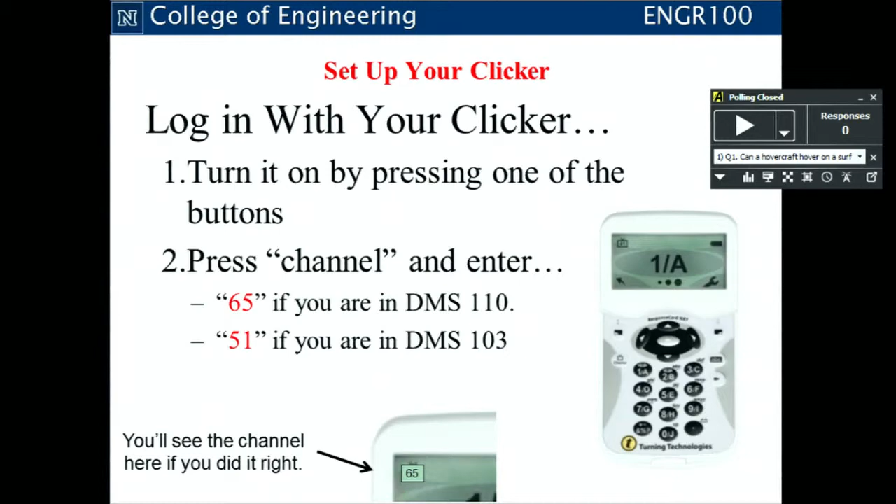All right, so 10-day plan. You guys have reading quizzes all the time. They're due every Wednesday at 11:59 p.m. Please don't log in at 11:57. If it times out while you're taking it, then you get a 0. So make sure that you get in there early in case you have any problems or something like that. But please get used to taking those. They'll be due on Wednesdays.

Your team charter, the due date got pushed back to this Friday. And you'll, yay! All right, who doesn't like to procrastinate a little bit? Friday by 6 o'clock in the EDL, so make sure you guys drop those off, get them to a TA or to Dr. Lacombe or I. And please keep a copy. It goes in your team journal, which I'm sure is near and dear to your hearts. You guys are going to keep track of all semester.

Skills lab assignments are due at 11:59 on the night before your next skills lab. So if it is the night before you go to lab, stay home and do your homework. Make sure you get done. Don't wait till then. Yeah?

He asked if it shows that, or if he has class on Thursday and it shows it's not due till Sunday, is that okay? No. A resounding no. Thank you for that question. That is a great one. Your homework is due the night before your skills lab.

We attempted to set it up so we'd have variable due dates, but it turned out to be a major headache. So it may say Sunday, but the TAs, before they grade your homework, are going to go through and look at what time it was turned in. So make sure that it's in by 11:59 the night before.

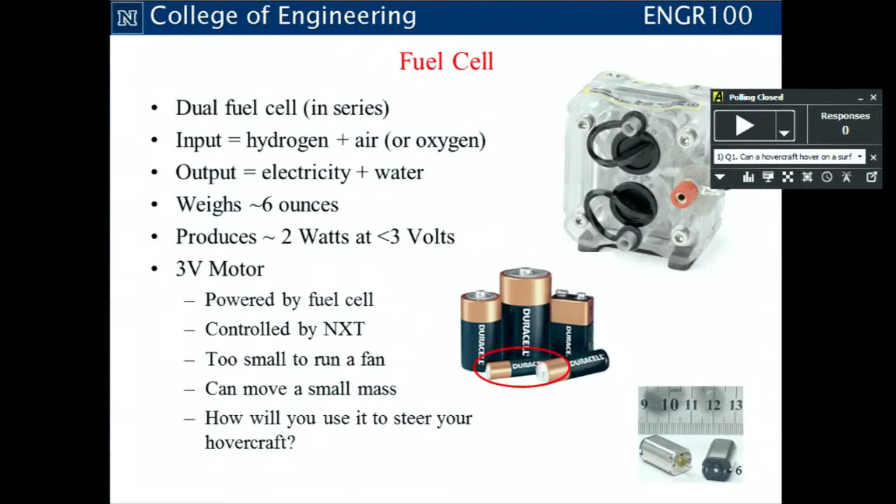Some of you might say, I've never played with an NXT, what are you talking about? Don't worry, we're going to go over programming in lab. We're going to use LabVIEW to control these things, and we'll talk about it in class and in lab. You guys will get the opportunity to program these a lot, so you'll be experts, hopefully, by the end of the semester.

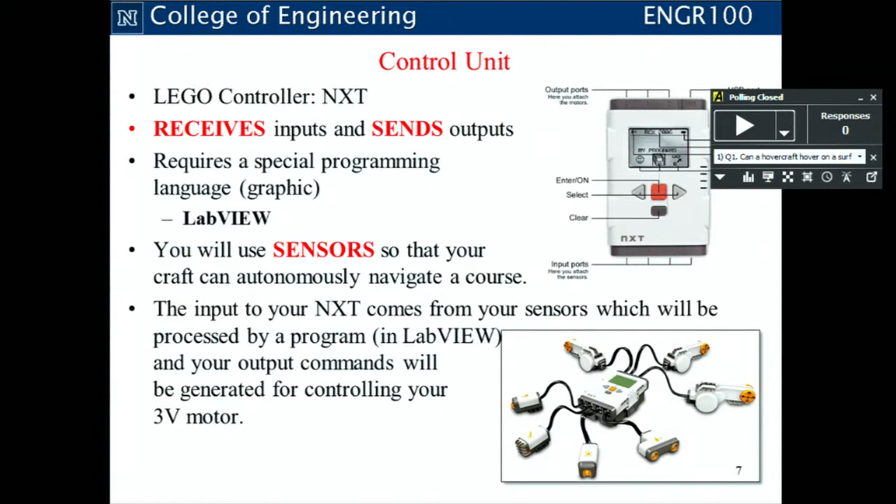Questions yet? These are easy. Okay, all right, $300 budget.

I believe this was a clicker question last time. If you missed it, don't miss it if it gets asked again. You guys have $300 between your team, whether you have 4 members or 5 members. The budget is for the total, complete cost of your hovercraft.

So if you were to choose non-rechargeable alkaline batteries, which we highly suggest you do not, but if you use them for testing, you'll be stuck in that part of the design process for quite a while. Then you use them for checkpoints and the final competition, but you want fresh batteries because you want the fastest hovercraft you can have. You start going through those.

Someone's running out to the student store to buy batteries, and every single battery goes in your budget. Even if your hovercraft only runs on 8 AA batteries, every single battery you buy goes into it.

If you go with the decking material, say you try and use plywood, go against what we suggested and say, I can use plywood, I can do it. That's fine. Then at some point you decide your hovercraft is really heavy, and you need it to be lighter, so you go with styrofoam. Guess what? The plywood and the styrofoam all go into that $300 budget.

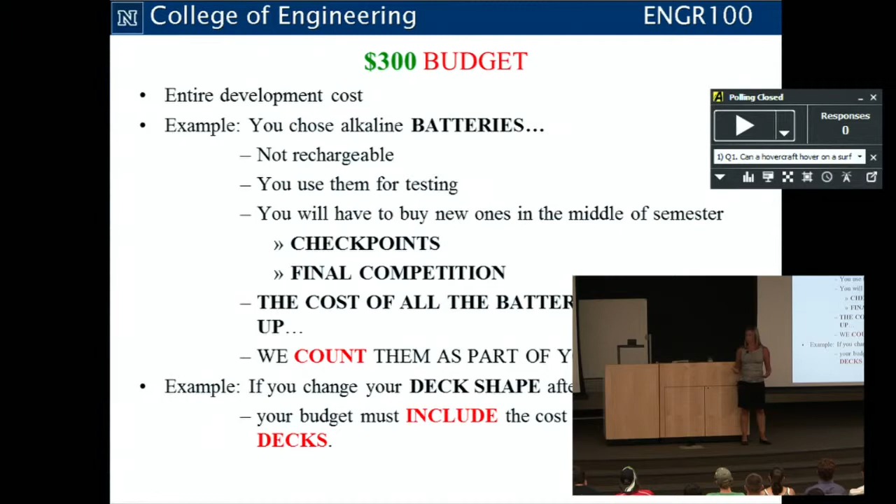We don't want you guys to spend a whole lot of money. We're trying to save you money. But that being said, we need to make good design choices. That's what engineering is about, right? We're going to do lots of calculations, design our hovercraft on paper. You guys are going to tell us what you plan to do, and we'll approve it and go from there. But please keep in mind, whatever you purchase, it all goes into your $300.

Questions yet? Yeah.

If you have materials that are free, you are very lucky. I say use them. If you can find stuff around, please don't destroy a desk to make a hovercraft deck. But yes, if you have access, we can discuss.

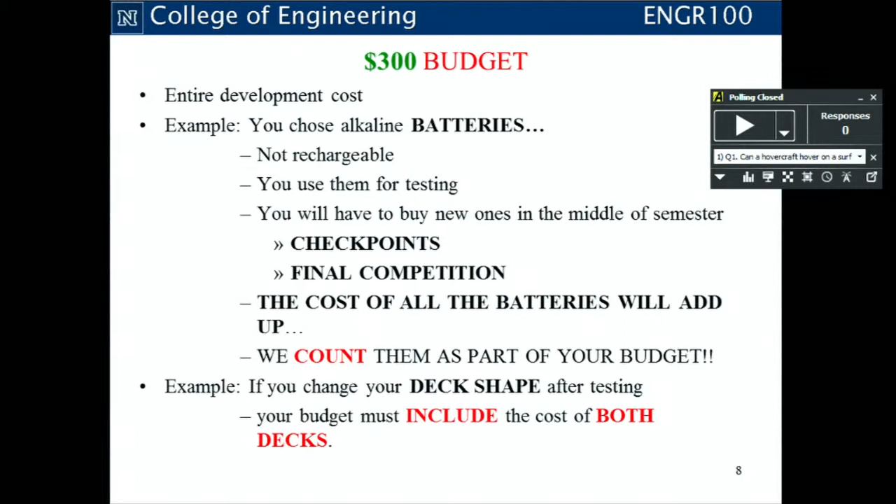Anybody else? Questions? No? Okay. More bad jokes, right? All right.

Do not buy anything yet. Please don't buy anything yet. We want to look at your designs. We don't want you to buy a bunch of things and then have to ship them back and waste money back and forth, ordering from someone who doesn't take returns, and so on. So do not buy anything until we approve your design.

You guys have a design concept paper due eventually where you'll tell us what you're going to do. You'll also have all your calculations due. The TAs, Dr. Lacombe, and I will look over those, approve them, and then tell you to go buy. So please don't buy things yet. Wait.

All right, so the main topic for the day is lifting fans. You might want to jot down a couple notes here. You can follow along with your calculators. A little bit of math today. First off, to tell you what I'm going to tell you for the day, you'll get used to that for your presentations. We are going to talk about lifting fans and how to choose them, and look at some examples.

But first we have to talk about what types of fans there are, the design procedure and how we do that, and then we're going to do an example calculation to finish up class today. So we'll go through all these things. It's a lot of information, just be warned. But you guys can go home tonight and do the lifting fan module.

And there's also a video that shows you how to do this. You guys are doing fans in Skills Lab this week, so you'll get to see this many, many times. If I'm going too fast and you have a question, just raise your hand. If I don't directly see you, it's hard to see everyone all at once, so yell or something, jump up and down.

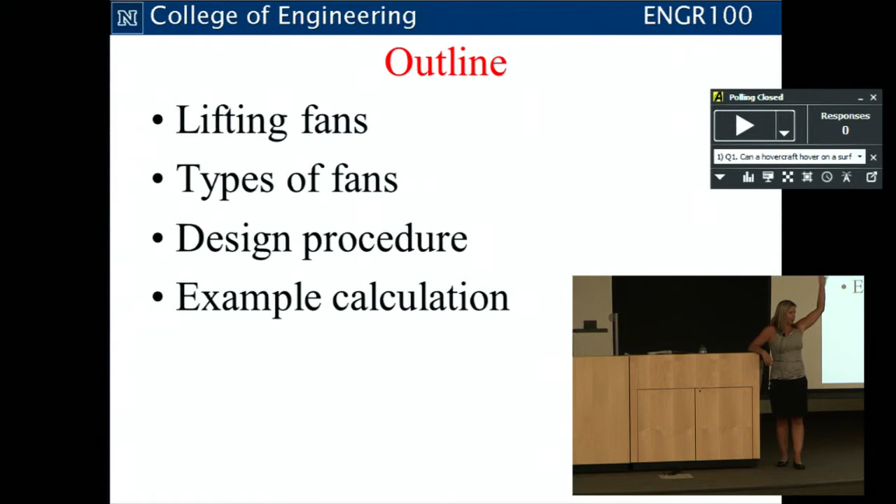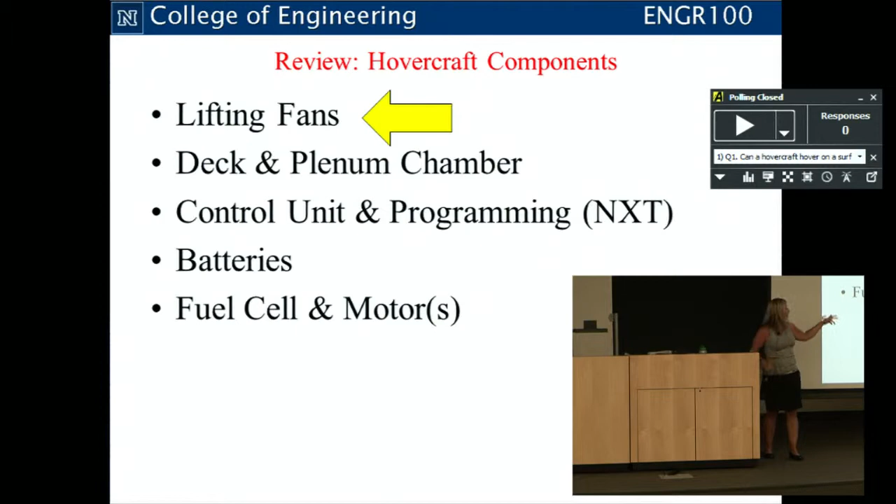Okay, so hovercraft components: you guys have your lifting fans, your deck and plenum chamber, the control unit, batteries, and then the fuel cell and motor. So we are focusing on lifting fans from here forward.

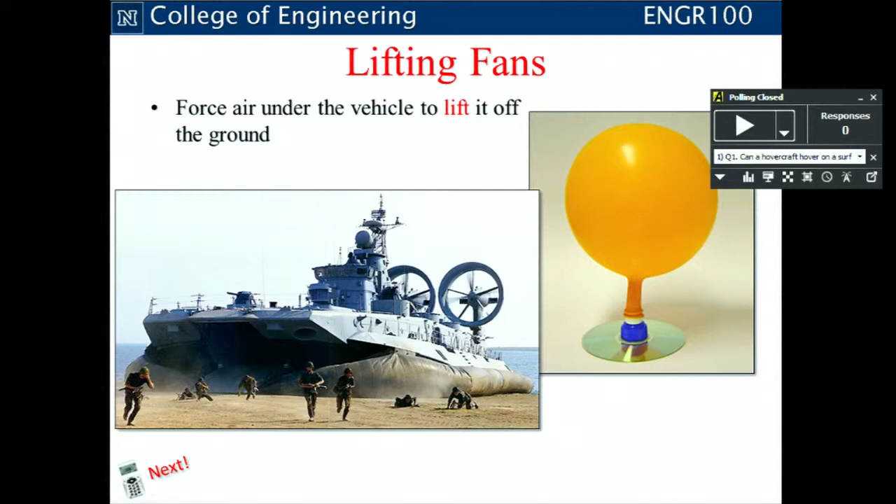Hovercrafts go on all scales. We've got the small little balloon one we can make in class, up to the military hovercraft. The Kiwis hovercraft you guys saw got flying around in New Zealand last week. Did you guys watch that video? I think so.

So, question number one for your clicker. Remember, you got to create pressure under your hovercraft. Hovercrafts are commonly used to float above water, concrete, sand, snow, and ice. Can a hovercraft hover on a surface made of mesh chicken wire? Yes or no?

Remember, your hovercraft needs to create pressure. You got to force air down and create pressure.

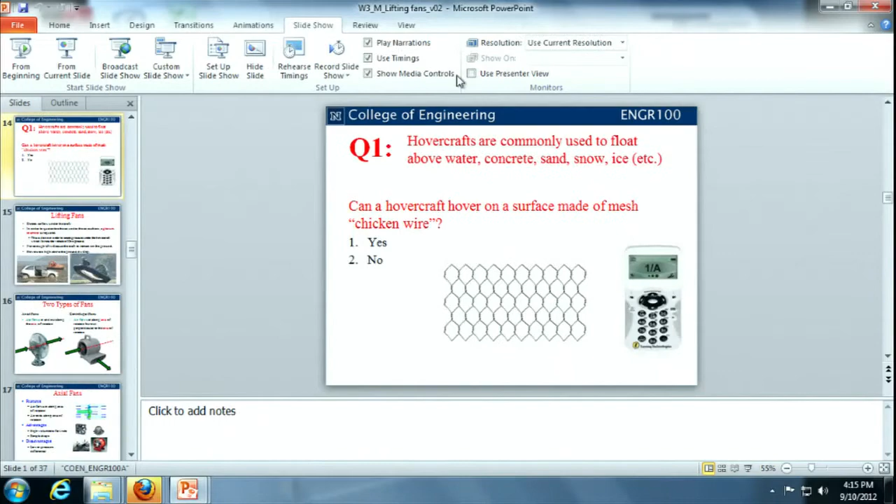Oh, no. Oh, well. Man. You guys lucked out. Let's see here. Oops, bear with me. Oh, I don't know if you guys were quite saved. Let's see.

Okay, you have a question? No, he's asking a question. He thinks he got his answer in. He was one of the lucky 27 in here. Good job. I think you should answer again. Yes, please. We'll try again. Sorry, we'll see how this works.

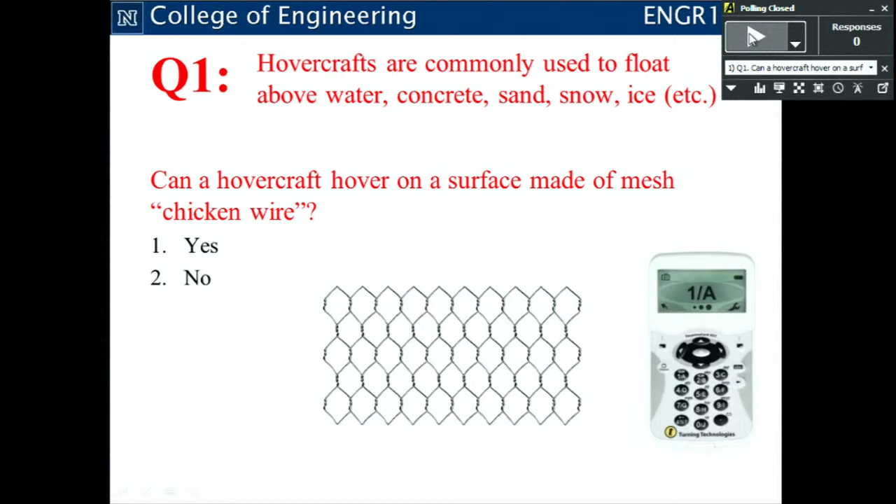All right, ready? On your marks, get set, go. What's going on? 377. 5, 4, 3, 2, 1.

This makes me very happy. This means I'm doing my job. Okay.

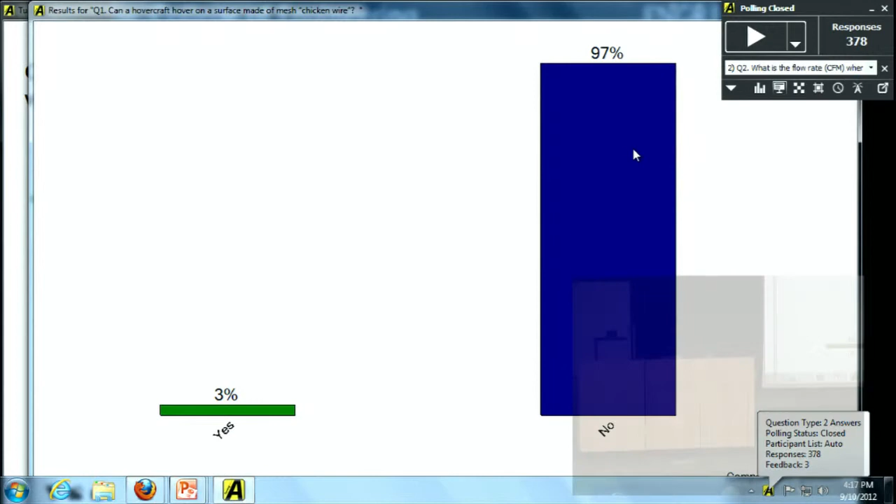If your hovercraft just had a mesh surface underneath it, the air will go right through. And if the air goes right through, you have nothing to build pressure on. So the air needs to go down to a hard surface. You need to trap that air. And as the air is trapped, your plenum chamber is going to fill up and create pressure, and you will get lift. Okay?

Questions? All right, good job, good job. Sorry about the confusion.

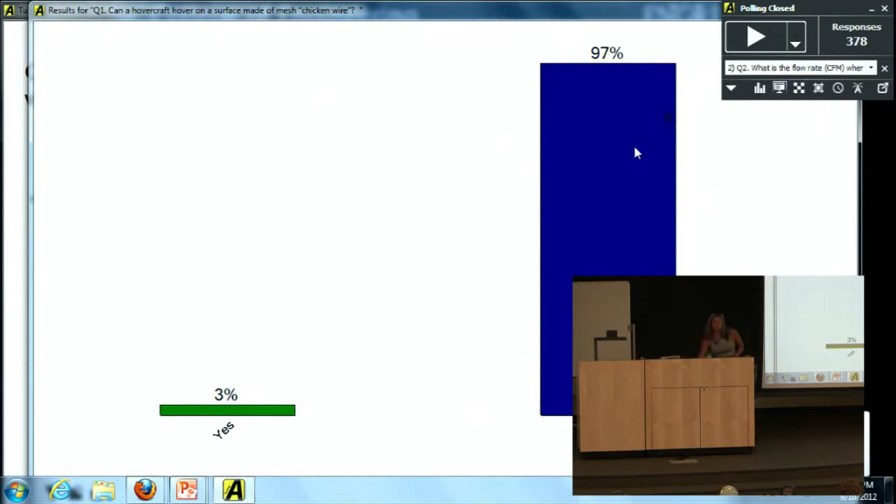Okay, moving forward. So your lifting fans are going to direct your airflow right underneath your craft. Your fans could be facing directly down if you want them to, or they could be facing a different direction, but you're going to need ducting that forces the air down. So the idea is that the air is going underneath your craft. You want it to fill up that plenum chamber. Remember, the plenum chamber is what's trapping your air underneath your hovercraft. So as the air is pushing down onto the ground or the track, that is going to slowly force your hovercraft off the ground. Okay?

So you need that plenum chamber, hard skirt, to trap the air. Not enough lift is going to cause your hovercraft to not get off the ground, in which case, let's try and get off the ground. If you get too much, your hovercraft can tip over like this guy over here, right? He's about ready to go backwards.

So be careful with your guys' hovercrafts in here. You kind of want to find that sweet spot, because if they're too high, they're going to be really hard to control. You're not going to have any friction whatsoever. It'll be easy to go down, but it'll be hard to go down in a straight line and make it back. So you want to find that sweet spot, and we'll talk about an ideal height today.

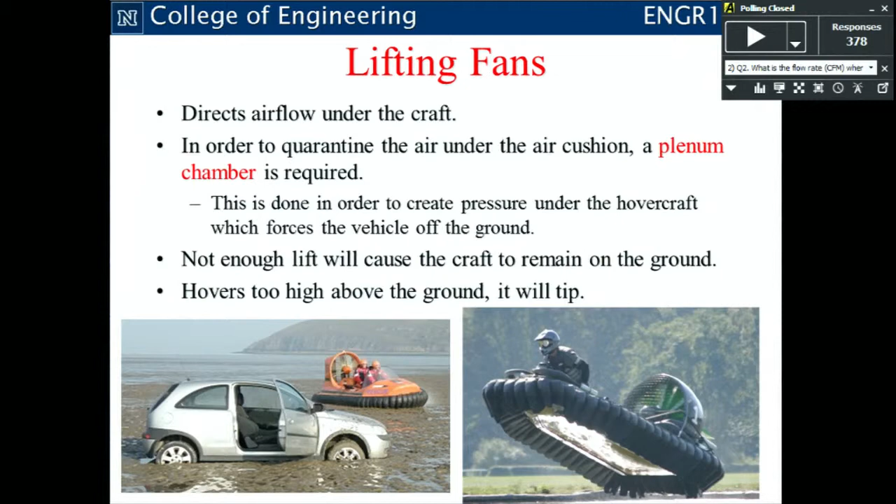All right, so there's two types of fans. The first is similar to the ones you guys probably use in your dorms that don't have air conditioning. It's just an axial fan. What it means is that the air goes in on one axis and comes out along that same axis. So axial fans, air goes in on one axis, comes out on one axis. We'll look at some characteristic curves in a minute so you can see the difference.

The second fan, which you may or may not have seen before, is a centrifugal fan. What happens with the centrifugal fan is our air goes in on one axis and it comes out perpendicular. You guys can see on the arrows on the PowerPoint here, we've got in one axis, out the other.

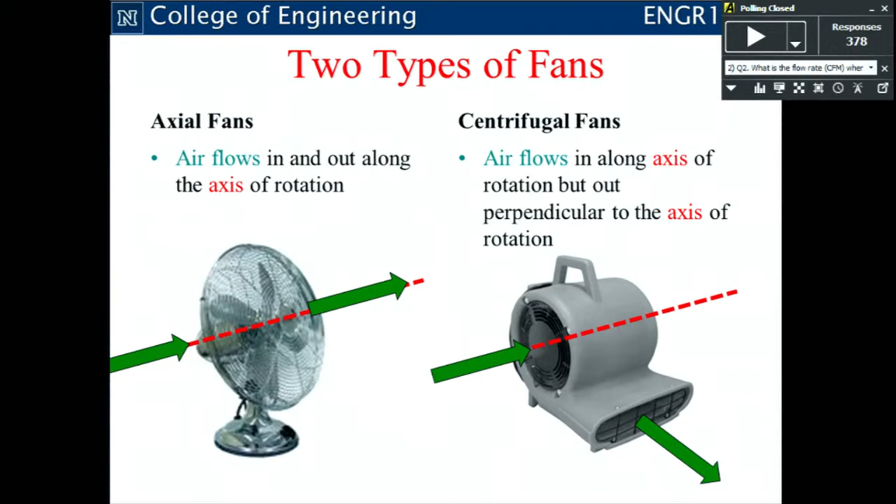And the fans can be used for fundamentally different things, and I'm going to go over each one of them now. You guys can decide which ones you want to use.

But the disadvantage to the axial fans is that they have a lower pressure differential. Remember, when we're talking about lifting, we're talking about creating pressure. You want to force air down to create pressure so you can get lift. These fans draw a lot of air, but they don't give out a lot of pressure. You guys have hopefully seen computer fans, that's kind of what we're talking about here. If you have a computer fan running, you don't get a huge breeze if you put your hand in front of it. Not a whole lot of pressure coming out of there, but a lot of air comes through.

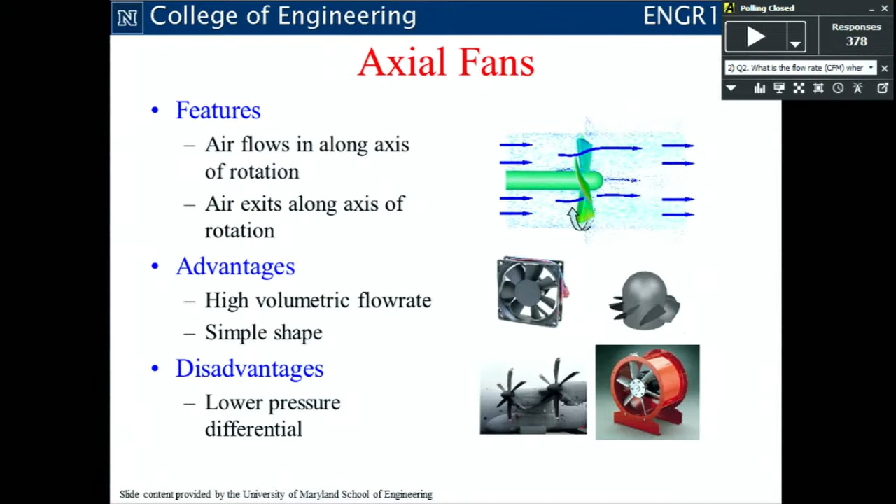On the other side of things is the centrifugal fans. Again, you get air along one axis and out perpendicular. The nice thing about centrifugal fans is that you get a high pressure differential, a lot of pressure coming out of these fans. The disadvantage is it's not pulling as much air as an axial fan, and it's more complex, kind of looks like a funny little conch seashell. So it's a little harder to build with, but I have faith you guys can do it. So a centrifugal fan: you get air in one axis, out the other, and you get lots of pressure.

Yes, in the back. By comparison, which one ends up being hotter? I would assume that the centrifugal is going to run a little hotter because it typically draws more amps. Yes? Why do we care?

Why does it matter how much air the fan is bringing in versus pushing out? Right, but why the high volumetric flow rate? Good question. If you were going to use, well, you guys aren't because you're using fuel cells, but if you were going to use these fans for, say, propulsion or something, you might want to affect more air around you because it gives you more steering control, something like that.

Exactly. If you were using back fans, if you had fans on the back of your hovercraft, they're going to give you more control. For you guys, the focus is to get off the ground and get high pressure. But I want to tell you about the different fans available so you can make design decisions, right? That's part of the process, is seeking information. Anybody else? Good questions, thanks for those.

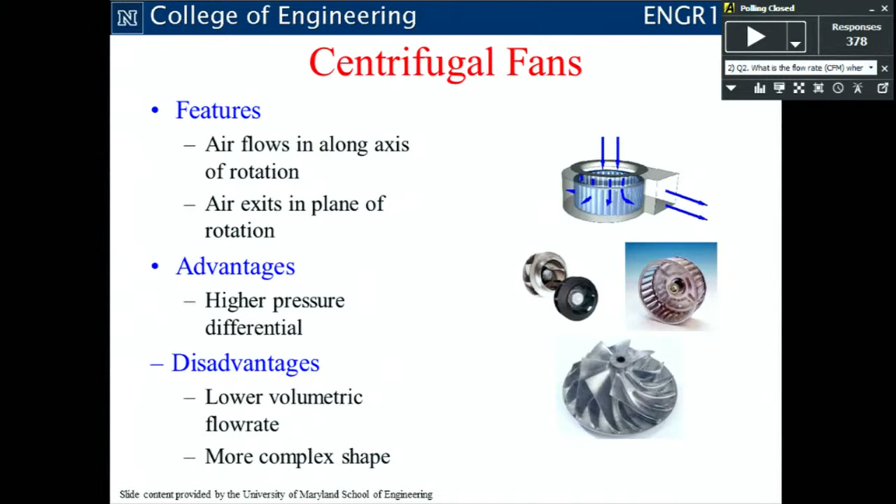Okay, next up, here's some curves to take a look at. You guys got to learn how to read fan curves, fair warning, there might be a question coming about them. These two fans are very, very similar, they have similar RPMs, meaning their rotors are rotating at the same rate. They're both 12 volts, 2.5 watts versus 3.5 watts, and they weigh about the same. Essentially, they're pretty much the same, but one's axial and one's centrifugal. There is a big difference here though.

You'll notice in our axial fan, if you guys can see this far, the pressure ranges from 0 to 70, versus on our centrifugal, we're from 0 to 200 on this graph. My flow rate, that's how fast the air is coming through, that volumetric flow rate: on the axial, I've got 0 to 2 down here, centrifugal 0 to 0.6.

Got one more graph I'm going to show you on the same graph. You'll see the curves and they look a lot different. But what's to keep in mind is when we look at lifting fans, we need to know how much pressure am I getting from that lifting fan. So if I said that I needed, let's go with something on both, let's say I needed 40 pascals.

And we'll look at this 12-volt fan, the 12-volt fan is in red. You'll find these fan curves when you look them up later, they have a bunch of different fans on the same graph, so please make sure you're looking at the fan that you want to purchase. Anyway, so if I have a pressure of 40, I'm going to come across until I see the line that represents the fan I want, and our 12 volt is in red. So if I go across that red and drop down, you can see that at 40 pascals, I can only get about 0.2 meters cubed per minute.

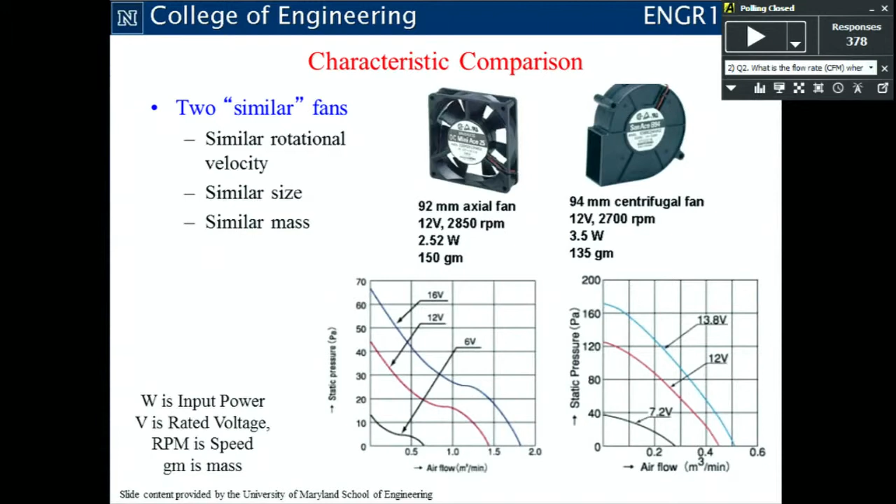So just for a comparison for you guys, if I come over here and I look at my pressure, 40, going across to my red line here, that's my 12 volt fan, and drop down, I'm getting about 0.3 meters cubed. So 0.3 versus, what did I say, 0.1 or so? 0.2? Okay, makes a difference. Oh, actually sorry, did I go? No, we're good, we're good. All right, so let's look at them on the same graph.

Maybe this will help if you didn't buy the difference yet. The red curve is the centrifugal fan, we can tell because it's got that high pressure. The blue curve is the axial fan, lower pressure but more CFM.

You could end up anywhere along this curve with your hovercraft. It depends on what pressure you're operating at. So if you needed a pressure of 60, this fan just won't work for you at all. That axial fan won't, but you could use the centrifugal fan.

And I'll show you another example as we do calculations. But keep in mind, you look for your pressure first, okay? Follow the y-axis along to that curve and drop down to find what your flow rate is going to be.

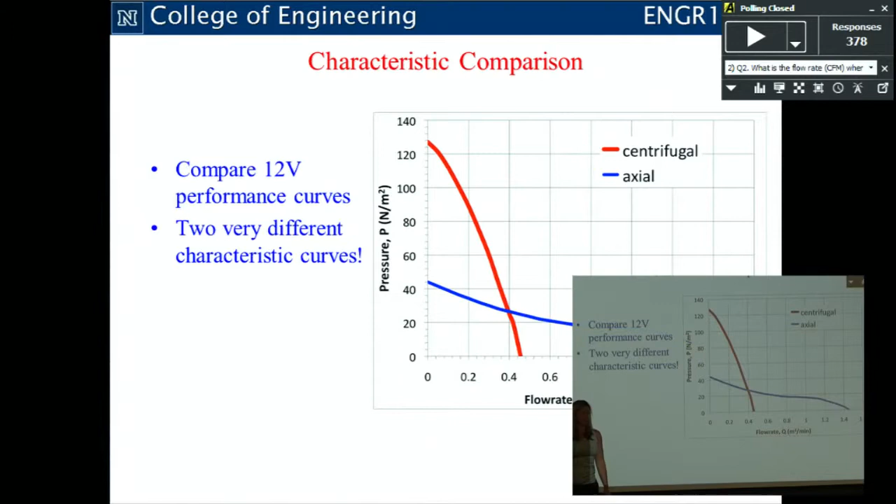What if you had more than one fan? Would it affect the numbers? If you have more than one fan, you can add up the flow rate, which is a very good question, because you very likely might have more than one fan. You can add up the flow rate. You cannot affect the pressure, though. So if you have two fans at 0.2 pascals, that does not equal 0.4 pascals. The pressure remains the same, but the flow rate will double or triple however many fans you have.

Anybody else? Yeah. For lift, he said, do you really want pressure or flow rate? You really want pressure. That's what matters when you're talking about lift fans. If you can't meet the pressure, you're not buying that fan.

The flow rate, we're going to go over some math equations. You'll see at the end, you need a certain flow rate also to get off the ground, but the pressure is the most important part, so the flow rate second. So I guess my point in all this, and we'll get to flow rate, is that you need a required pressure, and then once you have that, you make sure you have the CFM you need. So you need both. I just don't want people seeing a flow rate. If they need 100, I don't want them seeing 100 and not matching the pressure.

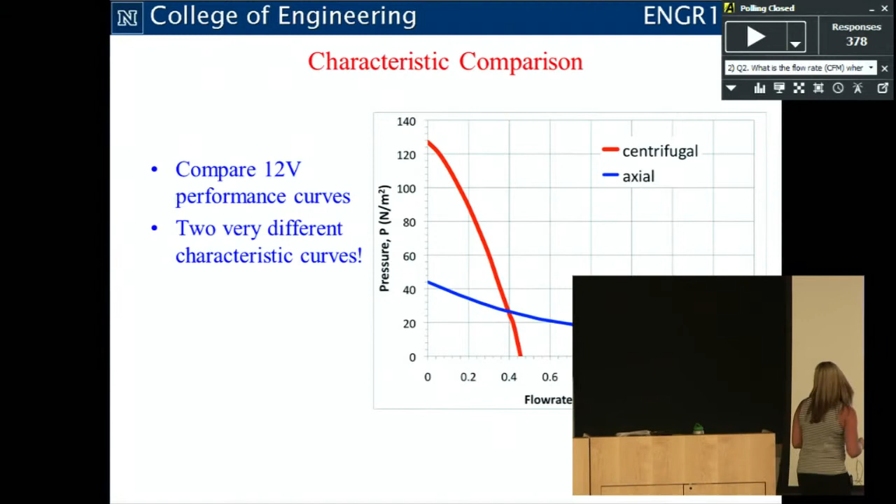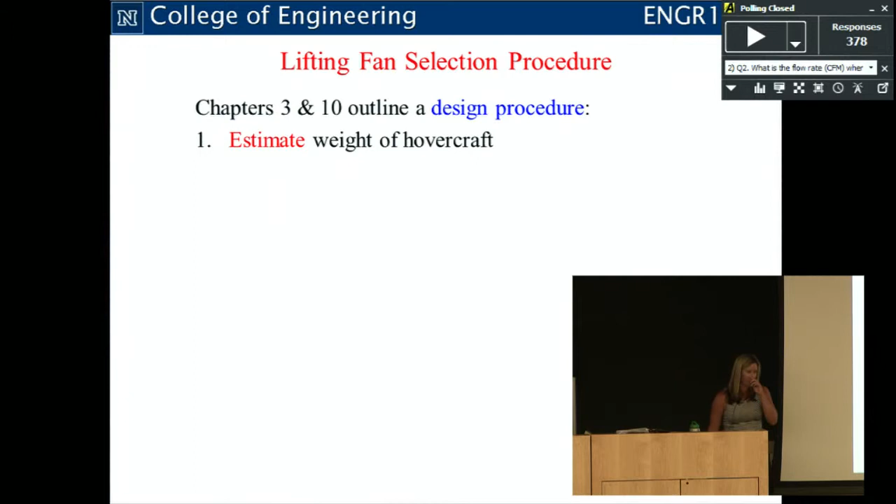Okay, so the procedure. Chapters 3 and 10 will be very helpful to you, please read them. And you also have the online module on lifting fans, keep in mind. So I'm going to give you guys the steps for designing your hovercraft's lift or choosing fans. Things in red are things that you choose. Things that say calculate are things that are just governed by math and physics, you can't change. But things in red are the things you choose, and that's the beginning of the design process.

You get to make these choices, and remember the design is iterative. So these choices you make, everyone in here is going to have different hovercrafts, right? Because you can all choose different things. So the first thing you want to do is estimate the weight of your hovercraft, and we'll use Excel to do that. I'm going to show you guys an example, list out the steps, and then we'll go through step by step with an example.

But first thing you need to do is estimate the weight. This means looking at how much the NXT weighs and the fuel cell, and looking at how many fans you think you need and batteries, and coming up with an estimate. It's not going to be exact. I get that, it's okay. But you need a good estimate. So first thing is estimate the weight.

Second, choose the desired gap size. The gap size is how high off the ground your hovercraft goes, so it's the gap between your plenum chamber and the ground. We'd suggest between 3 and 5 millimeters. That's typical. For our example, we'll do 5 millimeters, erring on the side that gives us a factor of safety, so we can make something heavier if we need to. Again, choose is in red, meaning that's something you design. You guys think about what you want to do. So now we've got a weight and a gap size.

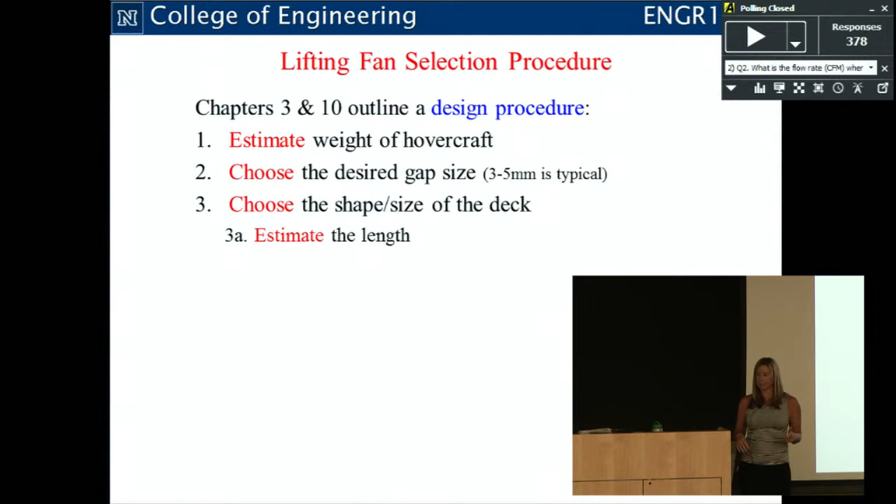A soccer ball, okay. And then once you choose a shape, you need to estimate the length, because you're going to have to calculate the area and the perimeter. So choose any shape you want, but keep in mind that you need to be able to calculate the perimeter and the area of that shape, as well as construct it and balance it. So our things in red here: we've got our weight, the gap size, the shape, and the size.

Those 4 things you can iterate later if you need to make changes. These are your choices. From now on, we're getting to more of the calculation side of things. You have to follow. So we'll calculate the perimeter and calculate the deck area. Start thinking about doing some brainstorming, doing some searching, reading your book, and finding out what shape and size is going to work best for you and your group.

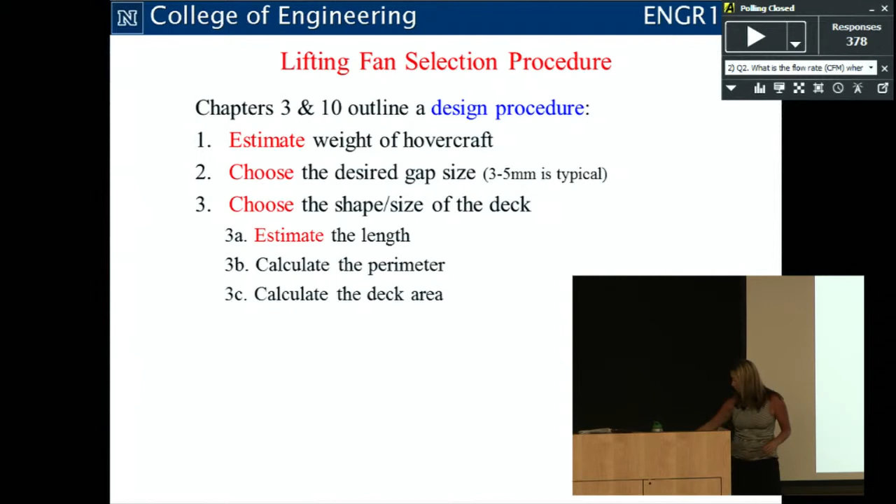All right, so after we have our area and our perimeter, we need the pressure required to generate lift. We've been talking a lot about pressure with these fans, and now we need to figure out what that pressure is.

And after we get our pressure, we need to calculate the gap area. We'll talk more about this. The gap area is, it's like the perimeter times your gap height. So it's a little bit of area between the hovercraft and the ground.

From there, 2 things left. We're going to calculate the exit velocity, or sometimes you'll hear me call it the leakage velocity, depending on the day. The leakage velocity is how fast air is leaking out the bottom of your hovercraft. Again, I'm going to go through each one of these steps, and I'll explain a little more about each step as we go. I just want you guys to have this ready to go for it.

All right, last but not least, we calculate the required flow rate of the lift fan. So we've got our pressure, and then we need to find out what that flow rate is that we need. So Q, or CFM, or meters cubed per minute.

And then we've done all our calculations. Yay, math time is over. We need to find the appropriate fan. Sometimes that's not possible. You may have been that group that waited till the last day to do your calculations and pick your fans, and all the other groups bought up all of DigiKey's other 300 fans.

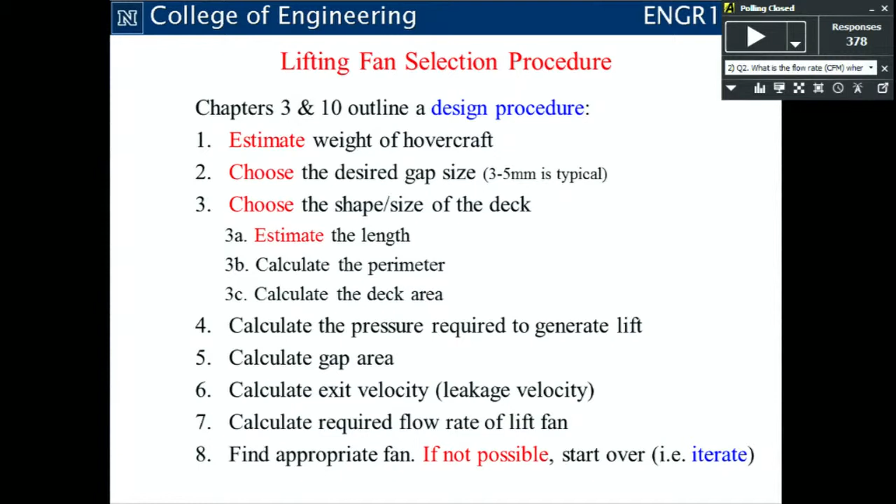Step 1, estimate the weight. In Excel, you guys will have a chart. You'll see up here I've got my main components, starting with the lift fan. I think I need 2 of those. They're going to weigh about 0.6 pounds each.

They get 1.2. You guys know how to put in equations in Excel now after Skills Lab this week, so this should be easy. You have your fuel cell and connectors and motor, NXT, some batteries, your deck, sensors, and relays. I have estimated these weights. They are approximate. So my approximate total weight I've come to is 3.03 pounds. This can change, but we needed to come up with an estimate, so here's our estimate.

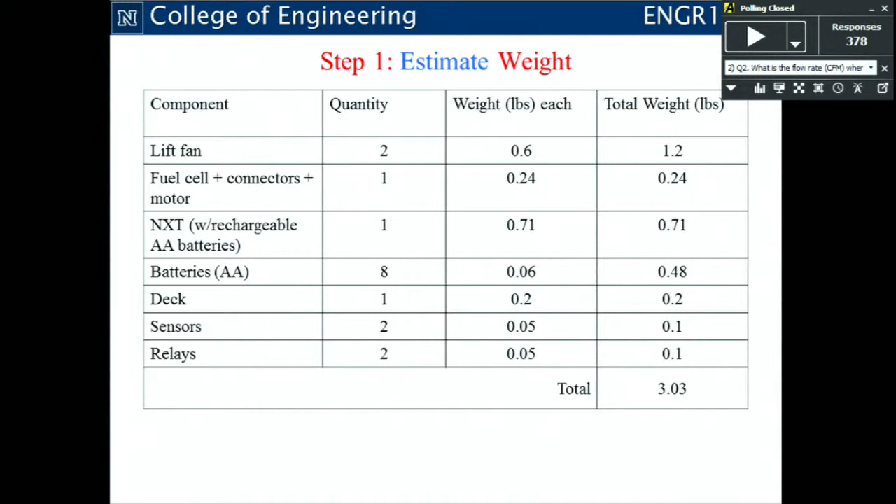Okay, moving forward. Next up, choose the desired gap size. So 0.2 inches or 5 millimeters is the maximum. We're going to use that for now because this gives us a little bit of error room.

If all of a sudden our weight estimate goes up, it's not that big of a deal. So we're going to use 5 millimeters for this example. The air cushion underneath the hovercraft is called the plenum chamber, and that is formed underneath the craft. The gap I'm talking about is between the plenum chamber and the ground. So it's barely perceptible, but it's there, and it's going to be 5 millimeters in our case.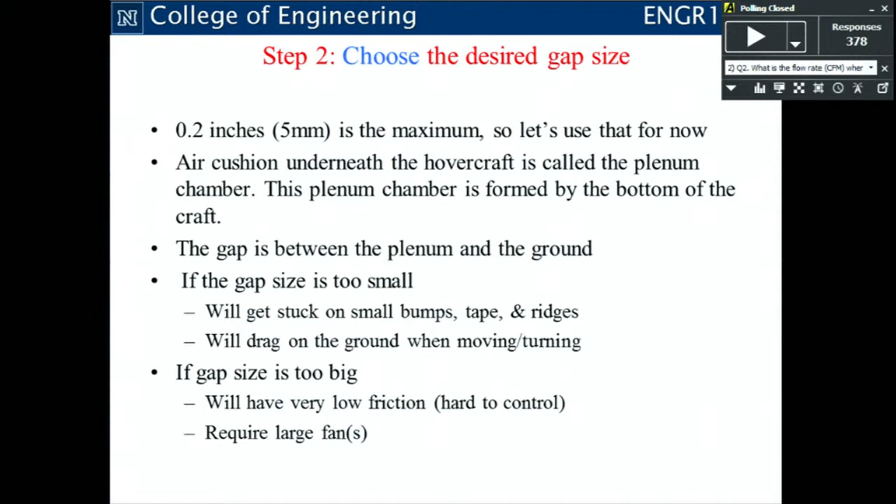If your gap size gets too small, if you calculate it and then start adding a bunch of art materials and stuff to make your hovercraft look really pretty, sometimes it can get stuck on small bumps, tapes, ridges. Another team could throw out a pebble or something. Hopefully they don't, but it can get stuck. It can also drag on the ground. That's kind of a problem. If you don't get off the ground, that's really a problem.

If your gap size is too big, you're not going to have barely any friction, and no friction means it's going to be really difficult to control. So we want to find kind of the sweet spot in between here.

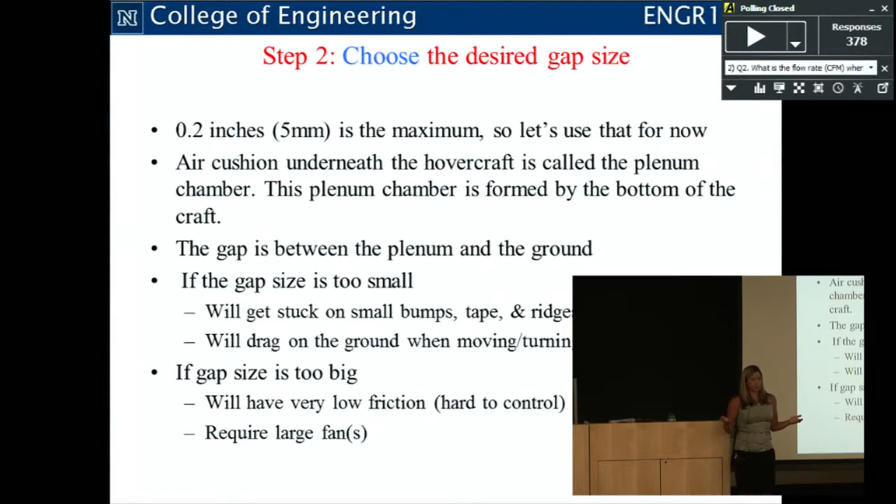All right, next step. So we have a gap height, and we have, what was our first one? Our weight. So now we need to choose the deck shape. Again, whatever shape you want, just beware that you have to calculate the area, the perimeter, and you need to be able to balance it. Common shapes are squares, rectangles, circles, a bullet shape, or a big oval, things like that. You guys choose. That's something you guys can research as a group.

So we're going to assume a square for this example. It's easy calculations. First thing I'm going to do is get the perimeter. The perimeter, we just add up the length of all the sides. And then we are going to get our deck area, length times width. And we end up with, what's it, 576 inches squared. So the start of the math is calculate the perimeter and the area.

Next step is ready. Am I going too fast? No? Yes? No? No one's yelling at me, so I'll take that as a no.

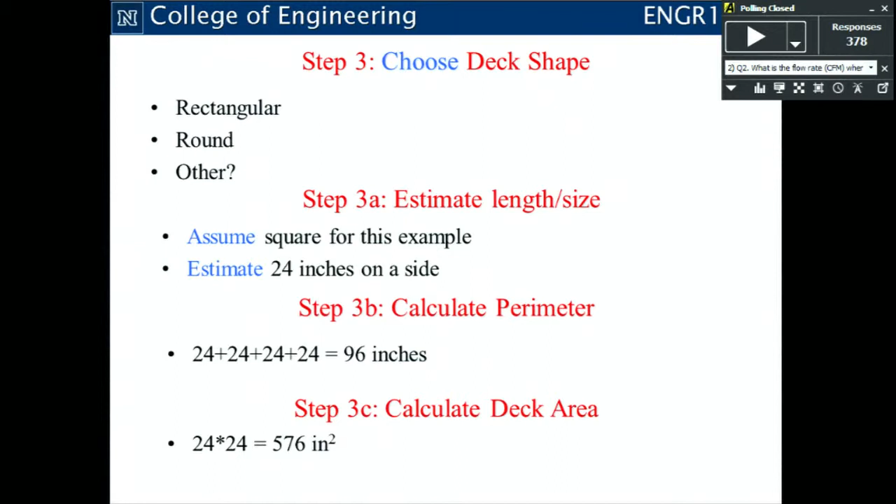Okay, calculate the required pressure. You'll see it as P REQ, pressure required. Pressure required is going to be force over area. In this case, your weight is your force in pounds. Your area is in square inches. So your pressure required is going to be, we're going to say 4 pounds, okay?

Because I don't want to rely on my weight estimate of 3, I want to give myself a little bit of factor of safety. So I'm going to go with 4 pounds divided by, was that 576 or 524? I can't remember now. Square inches. So we've got pounds per square inch. So if I divide my weight by my area, I end up with 0.0069 PSI. And a PSI is pounds per square inch. It's just a measurement of pressure.

So again, pressure is going to be the weight over the area of your hovercraft deck. So 2 numbers you already have, you divide them, and you end up with your answer, your pressure required in PSI, or pounds per square inch.

So next up, people say, well, what the heck is 0.192 inches of water? Inches of water is another measurement of pressure. It's an old school measurement you don't see very often. Has anyone heard of a manometer? A couple of you guys? Okay, so a manometer is like a U-shaped thing. It's got liquid in it. Basically you can measure pressure by applying pressure, and then the liquid goes up in inches, and you count those inches.

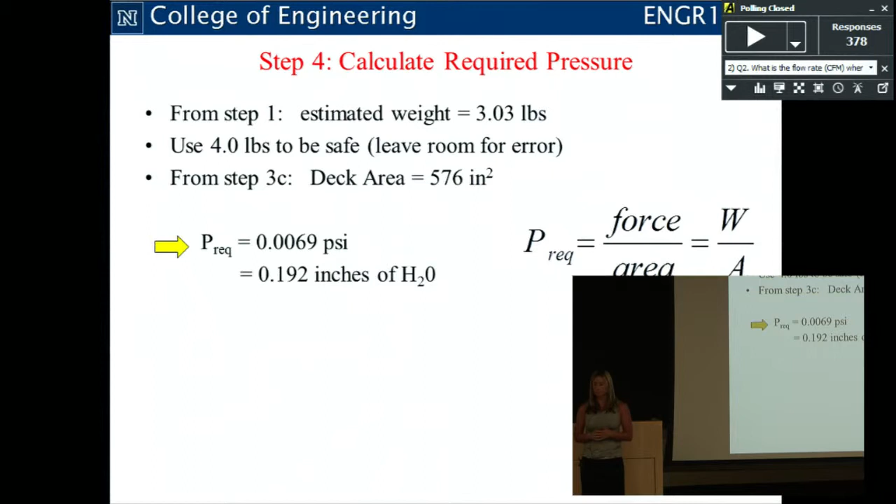I hesitate with this inches of water number here because the fan graphs, those data curves we were looking at before, are either in pascals or inches of water, but they're not in PSI. So we convert this number to inches of water and then set it aside.

The PSI number you have, 0.0069, is what we will use for calculations. Don't get caught in the trap of taking your inches of water and using it again. Remember, in all your engineering and math classes, be sure to write in your units and carry them as you go, because then you can check for errors that way.

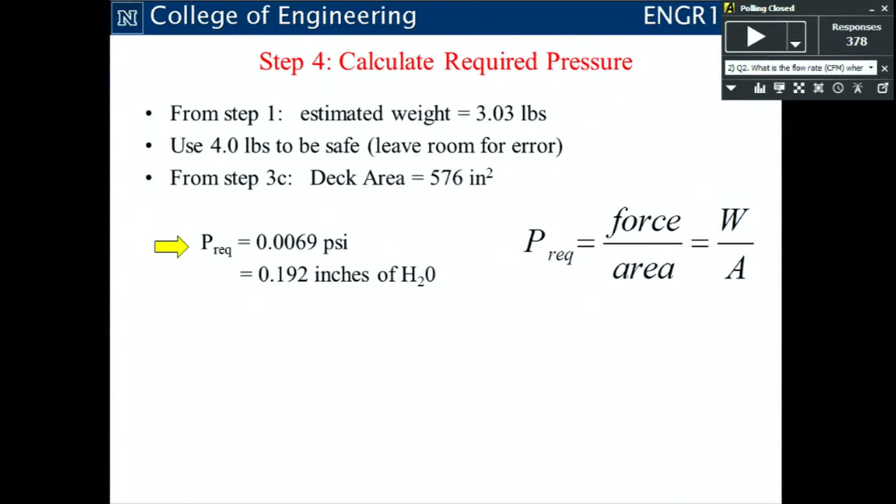Okay, are we ready for the next step? Because I'm running out of time, I better get going. Okay, calculate the gap area.

The gap area is just the perimeter of your deck — you already have that number — multiplied by the height of the gap. We use 0.2 inches, so perimeter times the height of the gap gets you this area where the air can leak out. It's a little tiny area all the way around your hovercraft, where the air can leak out from underneath. That is our gap area. So perimeter times gap height, easy multiplication, and you've got your gap area.

Ready to rock. Remember, this is all online for you too, so if I get going too fast, I'll try not to, but you can always review it.

Yeah, I converted — sorry, I went from 5 millimeters to 0.2 inches. This example is all going to be in the US system, so just keep it consistent, obviously.

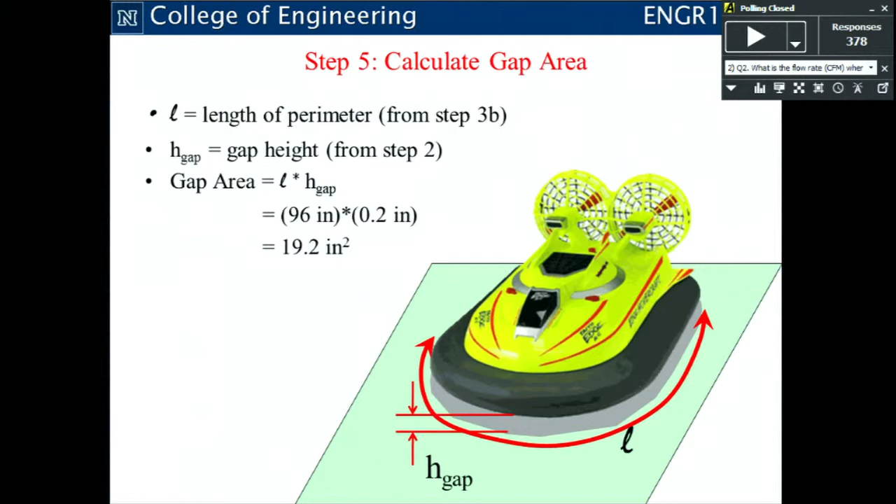Moving forward, step 6, the exit velocity. This is equation 3.13 in your textbook. It's a simplified version that comes from Bernoulli's equation, which you can read about and see the derivation. I'm not going to go over the derivation in class, though, because you can read about it.

Basically, leakage velocity, V sub L, is equal to the square root of 2 times the gravitational constant times the pressure required, divided by gamma. Gamma is the Greek symbol for the specific weight of air at atmospheric pressure. G, in this case, gravity, is going to be 386 inches per second squared.

I know people say G is 32.2 or 9.8, but remember your units — we're in inches per second squared, not feet or meters. So I've simplified this leakage velocity equation for you: I took the square root of 2 times G divided by gamma and came up with 4.182 times 10 to the third, which you can multiply by the square root of your pressure required.

A little bit of algebra. The main thing you need is 4,182 times the square root of my pressure required is going to be the leakage velocity. And the leakage velocity is how fast that air is coming out from underneath your hovercraft.

You'll be able to feel it when you get it built and going, but it's right here with these arrows. Your leakage velocity is how fast that air is coming out — again, 4,182 times the square root of pressure required.

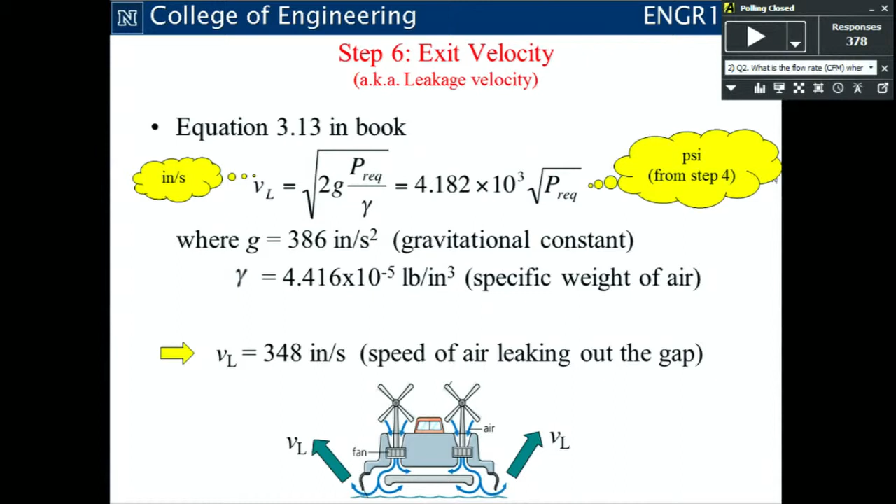Now we need the flow rate. Final math bit here, one multiplication. The flow rate is denoted as Q in pretty much all your engineering classes. Sometimes variables mean different things, but usually Q is flow rate. Q is your leakage velocity multiplied by the area of the gap.

So two numbers you have - we just calculated the leakage velocity, and we did the area of the gap two slides ago. Multiply those two numbers together, and you are going to get your flow rate. That flow rate, with the units we've been using, will come out in inches cubed per second.

Those fan data curves, though, they're in inches of water and they're in CFM, or cubic feet per minute. So this last step here, I didn't show you guys the math, but you need to convert your inches cubed per second to feet cubed per minute - that's the CFM, cubic feet per minute. You can multiply by 60, divide by 12 cubed, you can get there. You guys can do that on your own.

So that was the final math step. Now we have to find a fan.

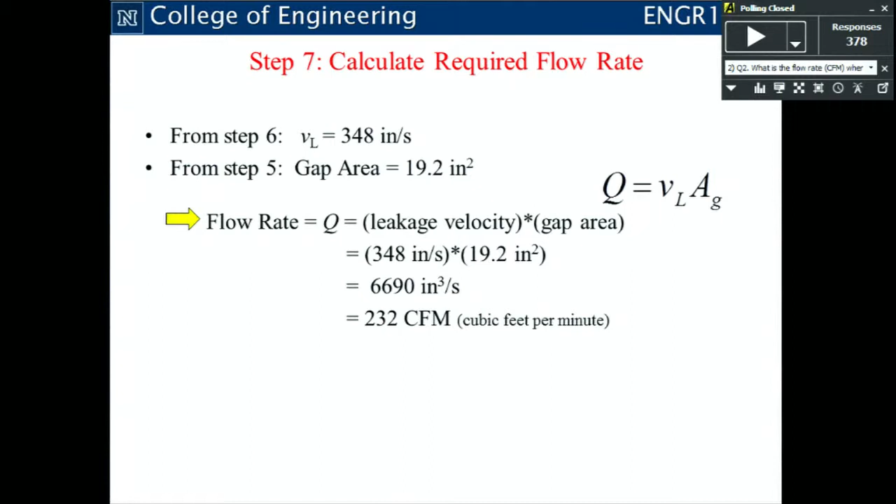In PSI - or sorry, when we look on fan curves, only when we look at curves, we look at it in inches of water. Okay, so go to...

digikey.com, QwikFlow, or some sort of computer parts place, and they'll have fans. If you go to DigiKey, it's super easy, they have zillions of them. You search fans, go to DC fans - we're using batteries here. You want in stock and 12 volt. Make sure you choose in stock, because DigiKey will list stuff that they will have in a year from now, and that's not going to be very good for your grade come December.

You can filter the flow rate by CFM, which is nice. You view page, and you get something like this.

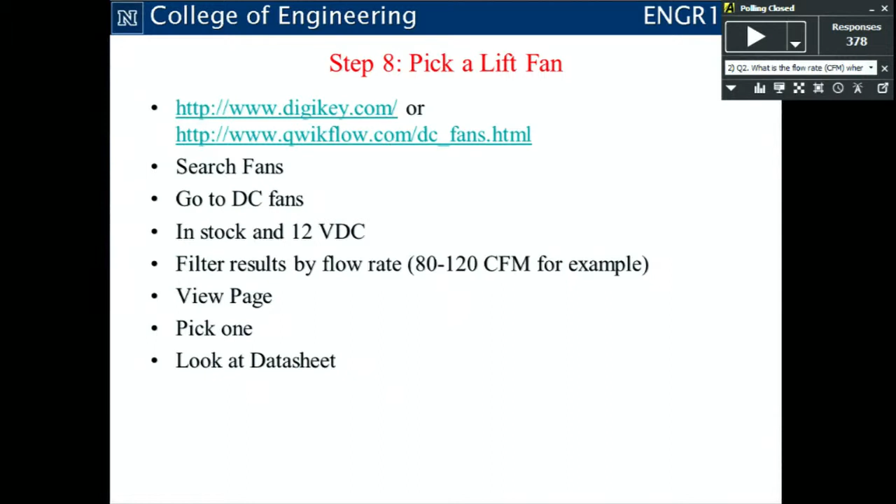And remember, this is all online. Okay, so make sure you have DC 12 volt fans. Are we good? You guys give me one minute, one minute, please. I think I have two minutes officially. Are you ready? Okay.

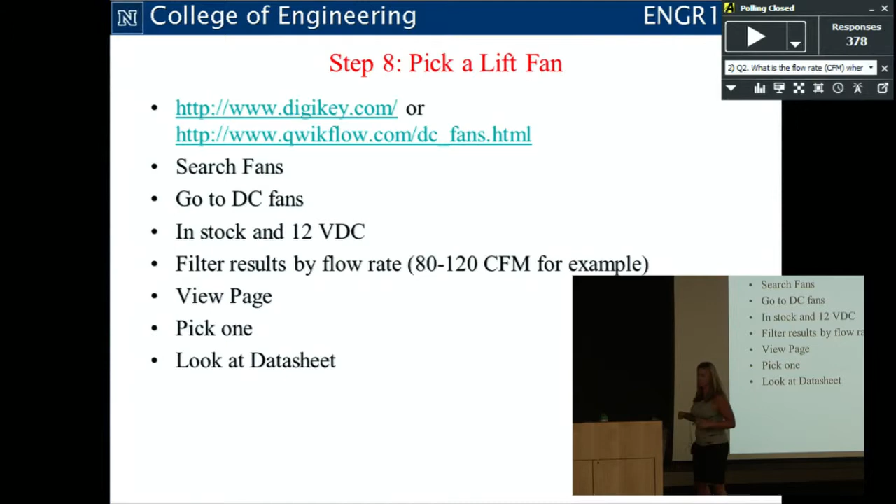You guys will get a page like this. Okay, these are your choices. You've got 0.2 inches of water, 0.268 inches of water, 0.313, 0.268, and you can see the different CFMs. The prices are over on the other end - you probably also care about those.

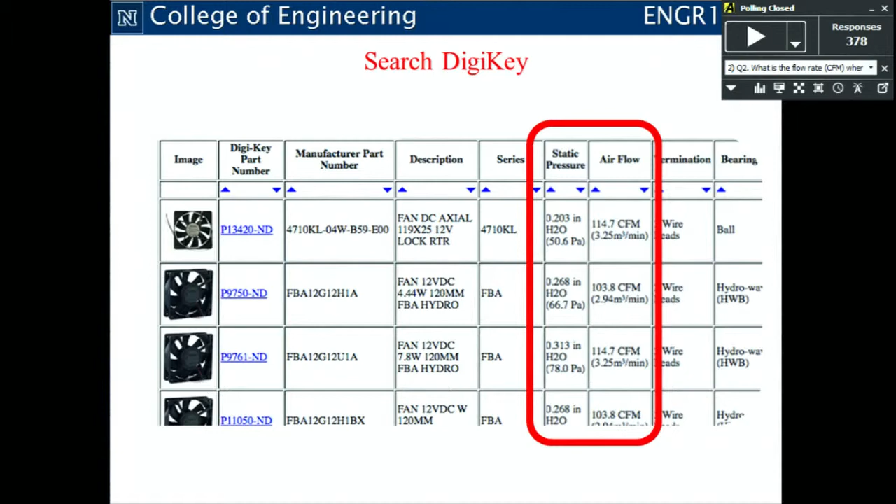Okay, we need to find something that meets the pressure that we need. Once we have that pressure, then we check CFM. Yes, they have all sorts of fans. All right, give me one more slide, one more slide.

It's 48 after. Okay, you guys, there is a Q of 232 CFM. Your pressure required is 0.192. So what you guys need to do is look on here for 0.192 - that was the pressure required, the weight over the area from the beginning. Find 0.192 on the graph. The line goes across to your fan curve. Once you get there, drop directly down, and that is the CFM that you're going to get.

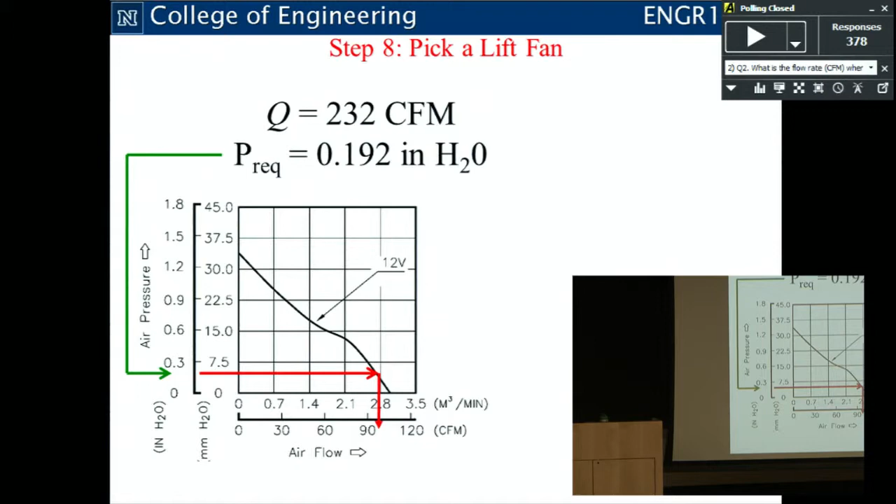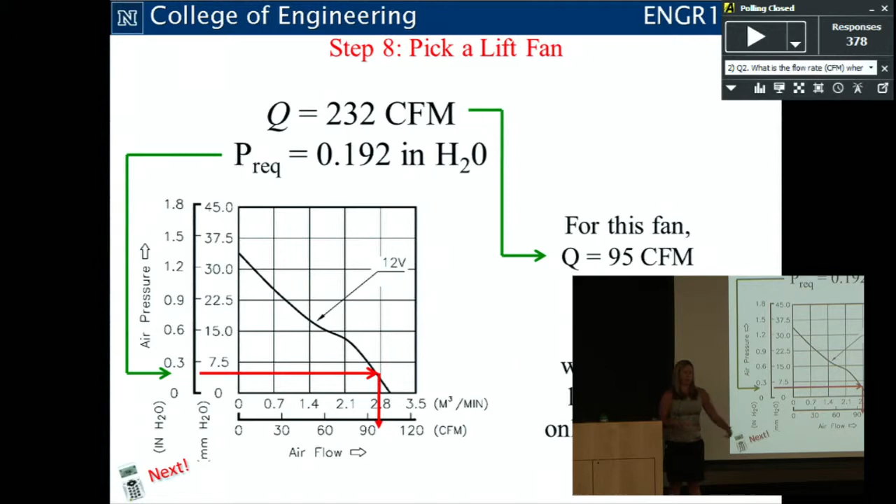So you're getting about 95 CFM. Make sure you go to the pressure required first, follow it across, and drop down, and you get your CFM. So for this fan, if you get 95 CFM, and we need 232, we would need 3 of these, but we only estimated for 2. So that means we'd have to add another one that changes our weight, and it changes how high our hovercraft hovers, and we're into this iteration and reiteration process.

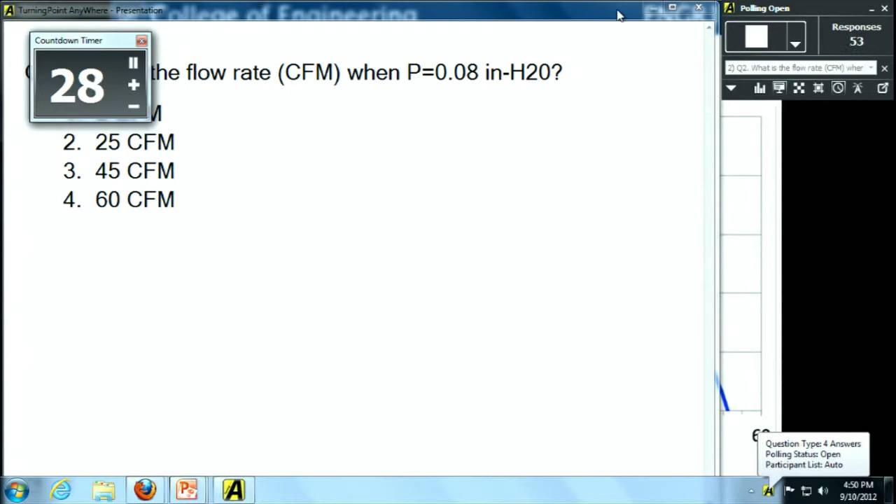And last but not least, I have a clicker question before you go. What is the flow rate when pressure is 0.08 inches of water? I will hit go right now - 30 seconds. You have four choices: 0 CFM, 25 CFM, 45, or 60.